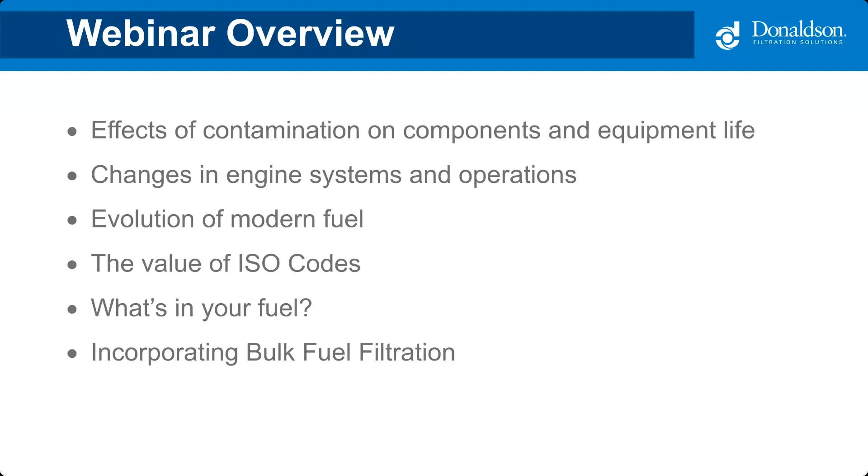For those unfamiliar with Donaldson Company, we are a filtration and separation company that's been solving complex filtration challenges for over 100 years and continues to advance filtration for a cleaner world. Today, we are one of the largest providers of unique filtration technologies, and we excel at producing high-quality filters and parts. We pride ourselves as having a global reach with a local touch. Our world headquarters is in Bloomington, Minnesota, and we have 55 manufacturing plants and 11 distribution centers around the world to support our customers.

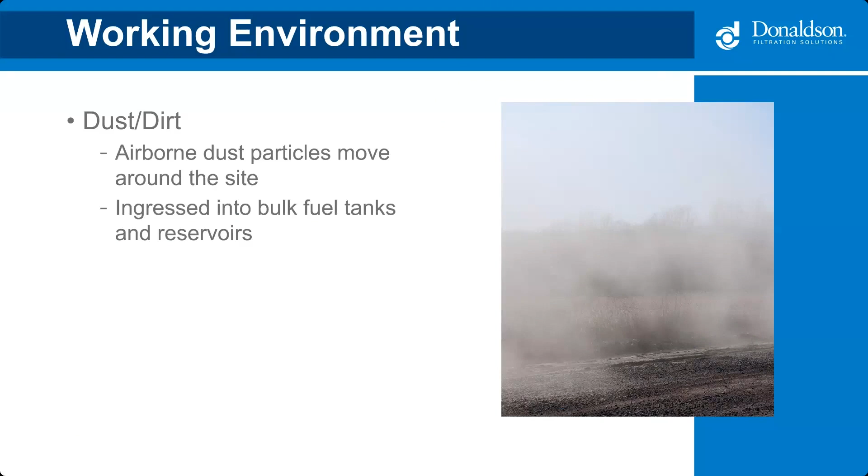Well, first, especially in the mining and oil and gas environments, heavy equipment environments like that, our working environment brings with it a lot of contaminants to that space. Number one is the dust and dirt. Airborne dust particles move all around the site, and every time that we actually dispense fuel into something, we have to replace that volume of fuel with sucking it back into the breather. Anything that's floating around in that atmosphere is going to be pulled into there. Dust and dirt are likely culprits that get sucked right into that tank.

Along with any moisture, we don't think about that nearly as much. A lot of tanks maybe have rain covers or caps. But any humidity or moisture that's in the air, or even water from production of whatever the environment is, that moisture gets pulled back into that tank too. Think about, especially in the summer or spring and fall days, very humid outside. That humid air gets pulled into the tank and is able to come in contact with any of that fuel.

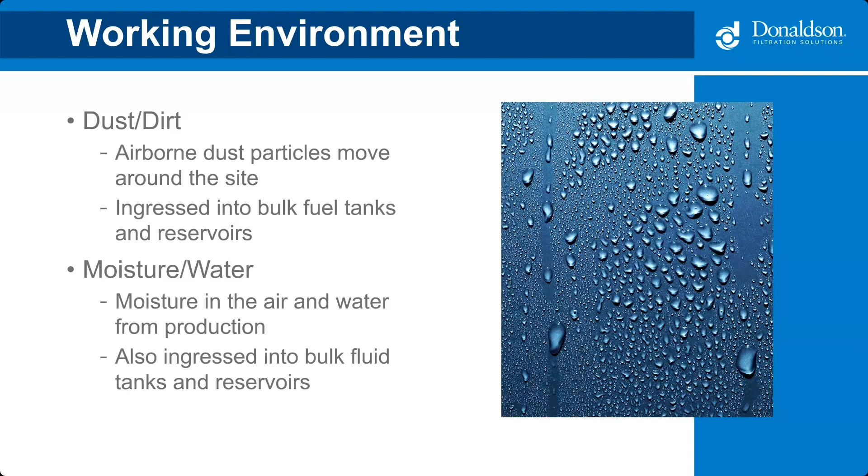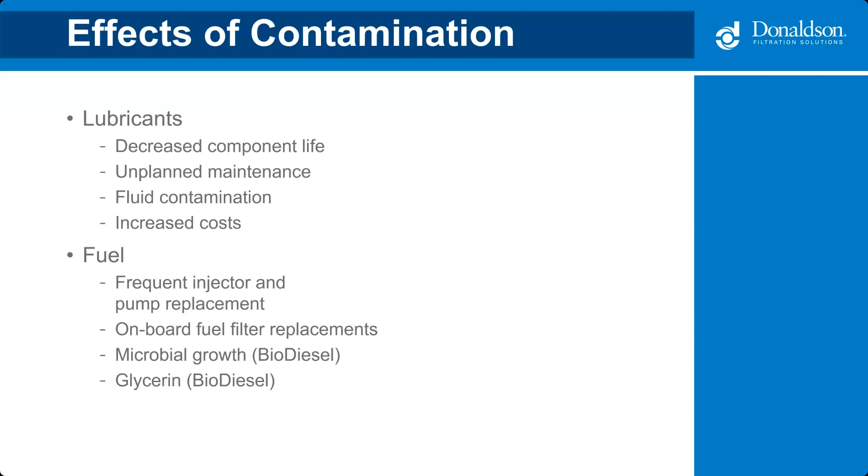Now, that working environment, those contaminants that are there, do lead to some effects that are on equipment. When we think about lubricants, probably everybody's fairly familiar with that. If we have contamination in the lubricant circuit, we have the decreased component life. It might come up with unplanned maintenance, maybe some fluid contamination, and overall increased cost for that system. But a lot of times we don't transfer those same thoughts to the fuel circuit, when in reality, those same issues occur on the fuel side of it, but we don't necessarily always think about keeping our fuel up to that same level of cleanliness.

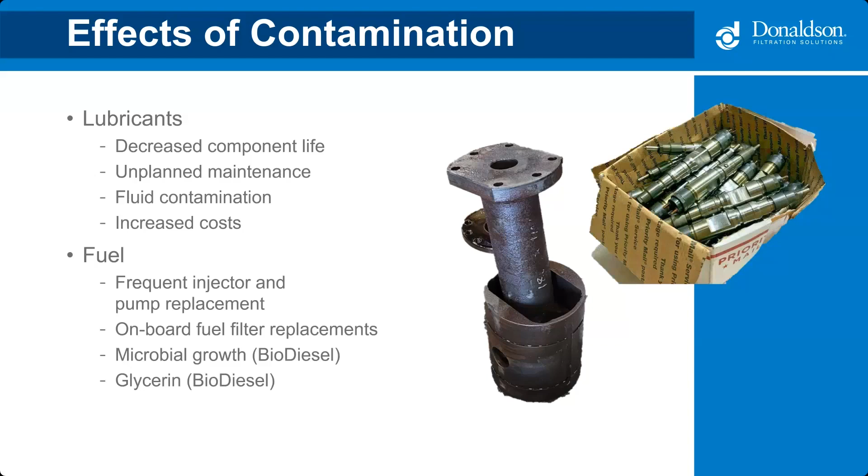We can see frequent injector or pump replacements. We might see onboard fuel filter replacements happen at a high degree, maybe large contaminants or sludge like you see on the picture there. Or even if there's biodiesel being used, we might see microbial growth or glycerin dropout, some of the different things that can occur if we allow that contamination into that fuel system.

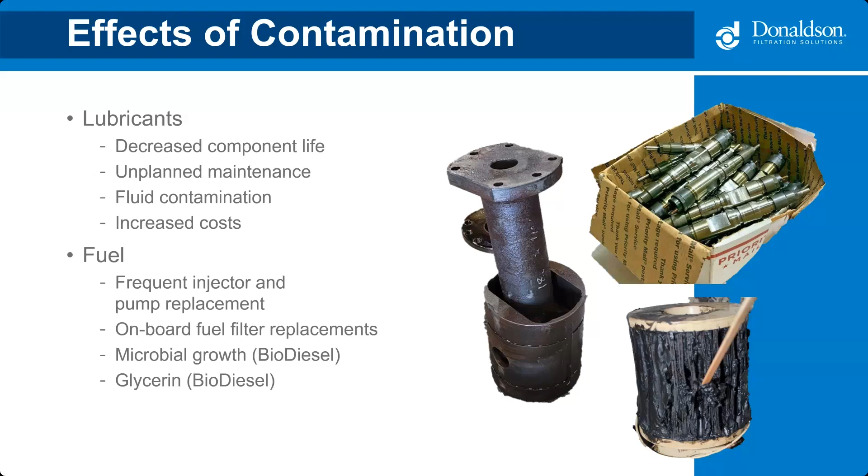Now, one of the questions that gets asked quite a bit is, why the big change? Why are we talking about this now? I've been doing this for 20, 30 years, sentiments like we've been having filtration the same way. Why are we changing it?

Well, the diesel engine itself at its core is relatively the same, but what's changed dramatically is how we deliver fuel to those cylinders. If you've been around long enough, you've heard about different changes with the EPA to get higher efficiency for that fuel out of that engine. The best way to do that was to increase the fuel injection pressure of those systems. If you're familiar with the term high pressure common rail, almost all diesel engines have now changed over to that system. Where we used to have injection pressures of 3 to 5,000, maybe 6,000 PSI, we're now living in a world where injection pressures are 40,000 PSI plus.

We've also reduced sulfur, added biodiesel to systems, added exhaust after treatments, changed the oil viscosity levels, and added a lot of computers and overall cost to these engines. That makes a big difference in how we are able to operate them.

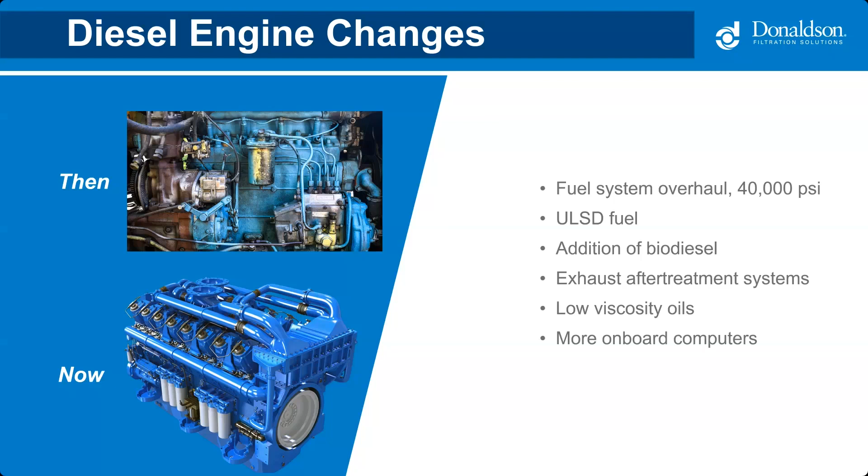Those tighter tolerances no longer can deal with that same level of fuel quality that we previously had. If you're familiar with some of those older series engines, you might recognize those filters were typically 10, maybe 30 micron for on-engine fuel filters. Today's engine fuel filter sets are usually somewhere between 2 and 5 microns, because that's the size of particulate that is damaging to those injectors and pumps. Somewhere in between bacteria and red blood cells, or 2 to 5 microns, those are the size particles that are damaging to those components within the fuel system.

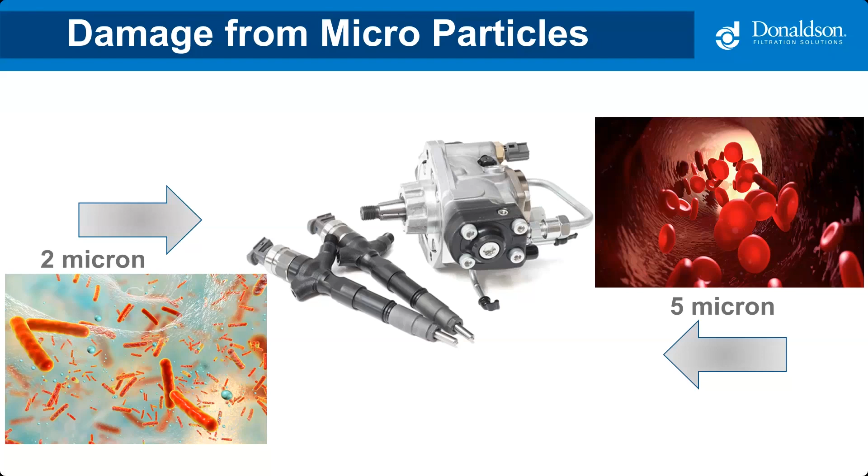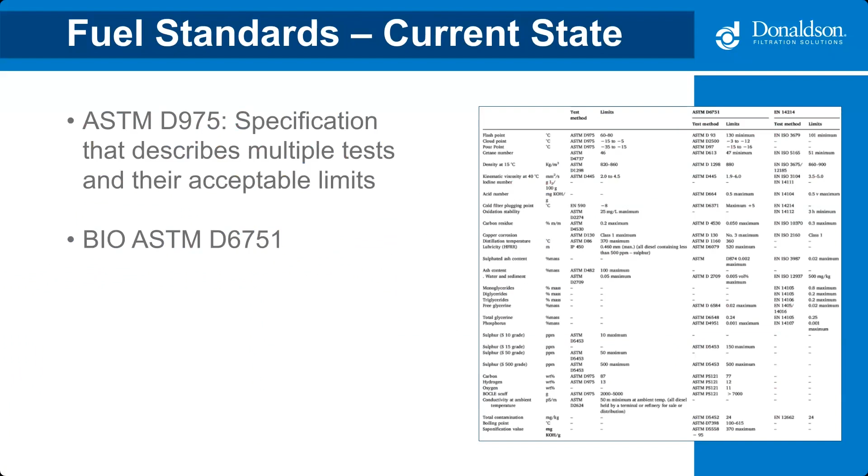Now, another question that gets brought up quite a bit is, okay, engines have changed, how we deliver fuel has changed, well I'd assume that the fuel has changed too. And you're right, there are specifications. I don't expect anybody to actually read the small print, but there are specifications for how fuel is regulated and what it needs to hit. The unfortunate thing is, although we've changed allowable bio content and reduced the sulfur content within fuel, the allowable amount of water and the allowable amount of dirt within diesel fuel has not changed at all since the late 70s.

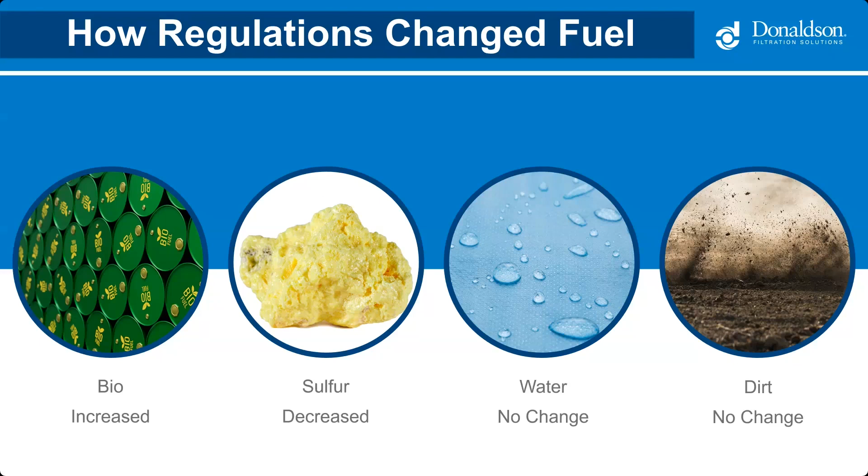The unfortunate thing there is today's engines cannot handle that same amount of dirt that was in yesterday's fuel, but we're still allowing that same amount of dirt to be there. What that means from a testing standpoint — again, I grew up doing some farm and construction type stuff — if ever we thought we had a fuel problem, typically what you'd do is dispense it in some kind of clear container, hold it up to the light, and say, okay, does that look clean and dry?

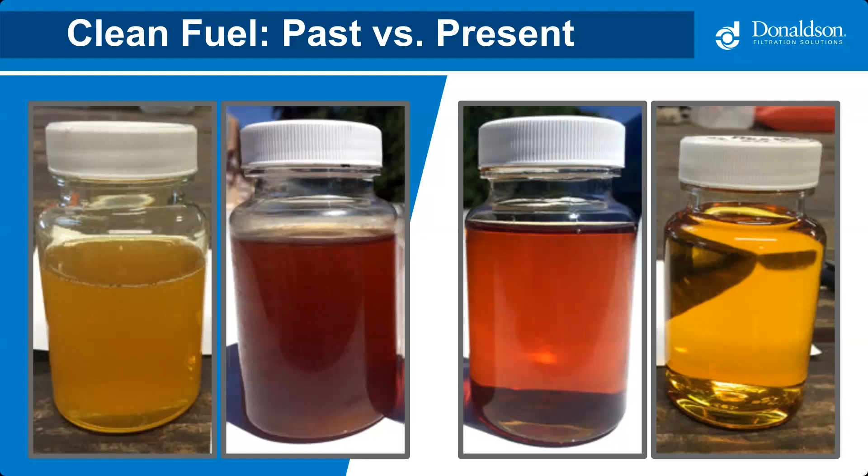But when we look at these fuel samples, hold those up to the light, those things look crystal clear. To the naked eye, looking through it, I don't see any water in there, I don't see any particulate in there. And that test for previous series engines actually worked out pretty well, because anything you could see in there was, okay, bad fuel, too big to go through that fuel system. But remember that 2 to 5 micron level we're concerned with today for today's high-pressure common rail engines — that, unfortunately, is invisible to the naked eye.

Even if it looks clear and dry to the naked eye, there's unfortunately going to be a really high concentration of small particles within that fuel sample, making its way into the fuel system and causing damage invisible to your eye. So how do we tell whether a fuel is clean enough or too dirty to be used in today's engines?

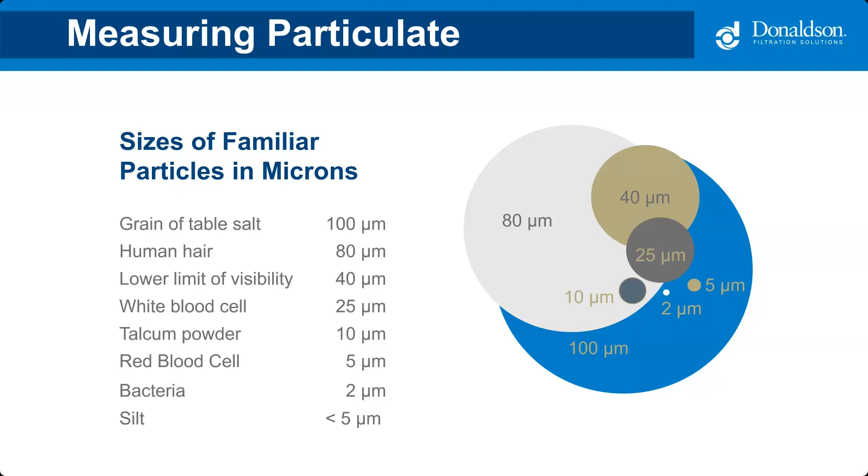The answer is the ISO cleanliness code. Some of you may be familiar with this. It's used to measure all sorts of different fluids, whether it's engine oils, hydraulic oils, gear oils, or fuel. Essentially, it's a way to describe the dirt or particle concentration within a volume of fluid, typically broken up into three numbers: the first is for all particles 4 microns and larger, the second for all particles 6 microns and larger, and the last for all particles 14 microns and larger.

When we're talking about fuel and high pressure applications, we have really small tolerances, so typically what we're focused on is that first number in the ISO cleanliness code. So for the rest of this, when I refer to a certain number, I'm referring to that first number, all particles 4 microns and larger.

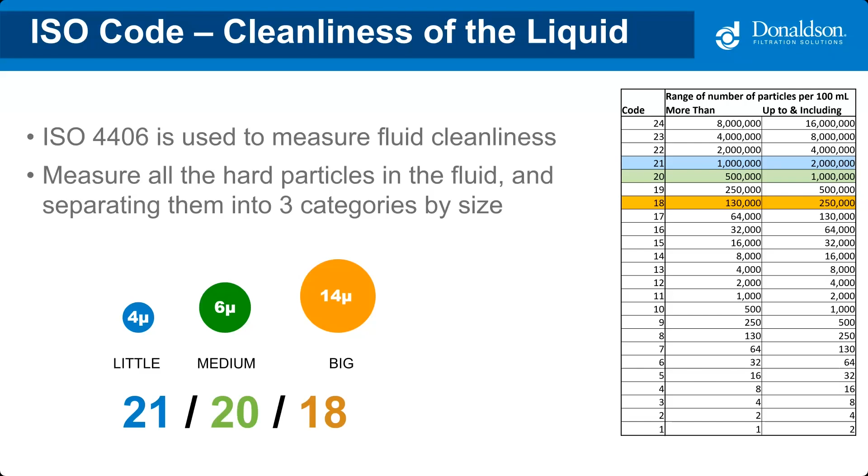But the other thing to be aware of is that this isn't just a linear scale. Each time you go up a code, you double the amount of dirt, so it's exponential in how it can get out of hand fast. Looking at that example code, a 21, on the blue line of the chart, there's roughly between 1 and 2 million particles in that sample given a cleanliness code of 21. Sample size is per 100 milliliters, so a little sample bottle would have somewhere between 1 and 2 million particles in it.

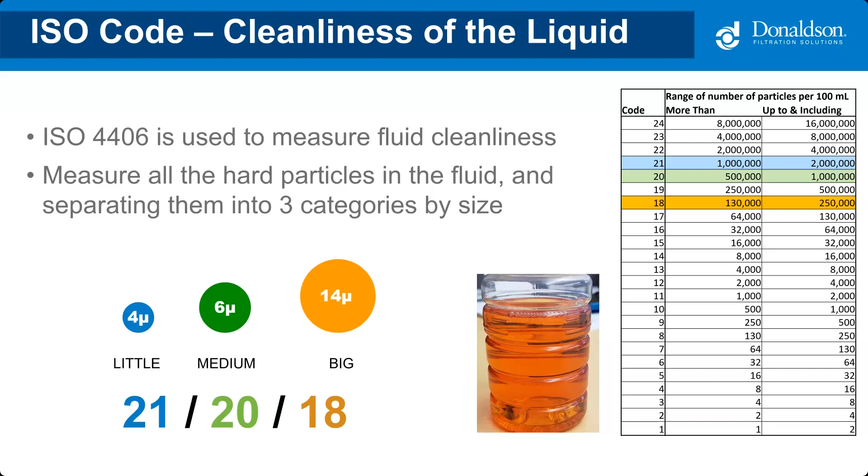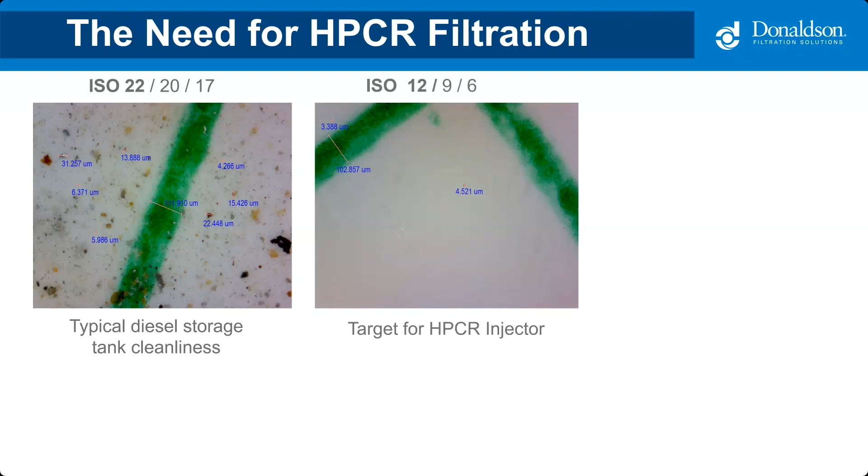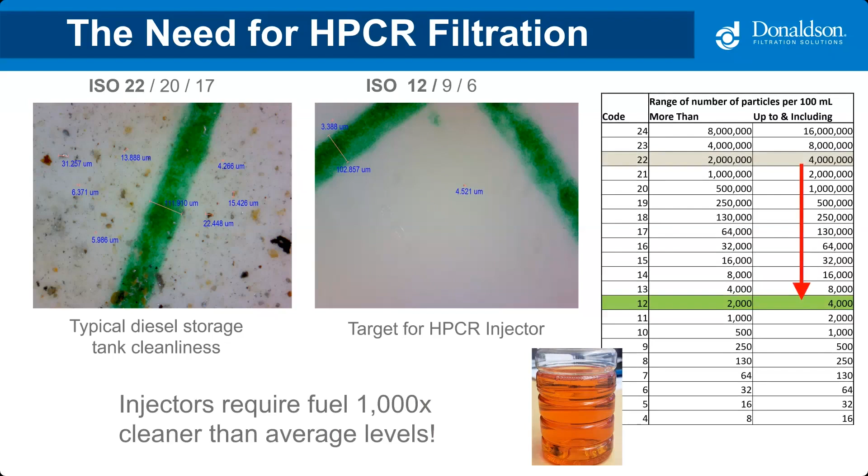Unfortunately, for today's high pressure common rail engines, we need fuel that's much cleaner. An example of what that looks like under a microscope is here at a 12 — there's roughly about 2 particles in that entire patch visibly seen. So we have a jump needed from inside that tank at roughly a 22, or between 2 and 4 million particles, down to a 12, or between 2,000 and 4,000 particles, before that fuel can be burned correctly in the engine. That's about 1,000 times cleaner than your average tank levels, and that's a lot to expect of that onboard engine fuel filter.

Then we look at the actual injector itself, probably the most susceptible piece within the fuel system that can be damaged or fail to reach its lifespan. This data here is actually from the largest injector manufacturer in the world, and what they state is that if you're able to get to that 12 level, represented by the green line, essentially 2,000 to 4,000 particles in that sample bottle, they'll reach what they call their lifetime, or roughly a 20,000 hour service interval.

But take a look at the lines underneath that. If we go up just one code, from a 12 to a 13, we've lost more than half the life of that injector. Go up another code, and we're at less than a quarter of the original injector life. So if you've been part of any organization where injector life has been extremely diminished, or there's a feeling that today's engines and injectors just don't last as long as their predecessors, most of the time that's realistically a result of fuel that's too contaminated to operate in today's high pressure common rail engines.

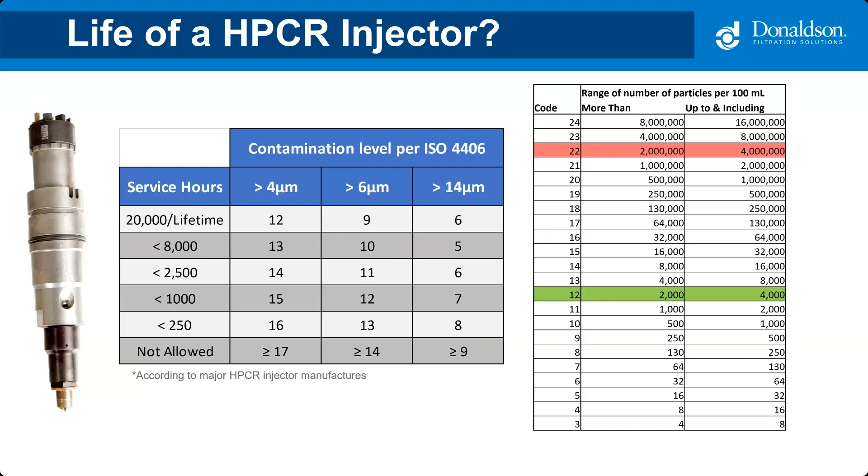If you've ever heard the term injector leak down, leaky injectors, or even had extended cranks during start where you get a lot of smoke coming out the tailpipe right at initial startup, typically that's caused by it not being able to hold back that pressure because of those contaminants.

If any contaminants or debris make it through there, remember we're at injection pressures of 30 to 40,000 PSI. If that contaminant makes its way through, those are the same pressures that a water jet cutting machine uses to actually cut through steel. So if you accidentally have any of those contaminants in there, it's going to open up that hole on an injector nozzle tip.

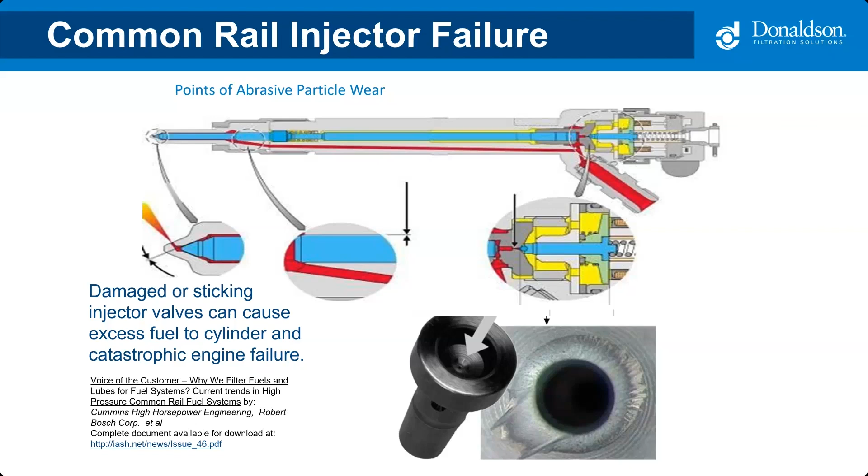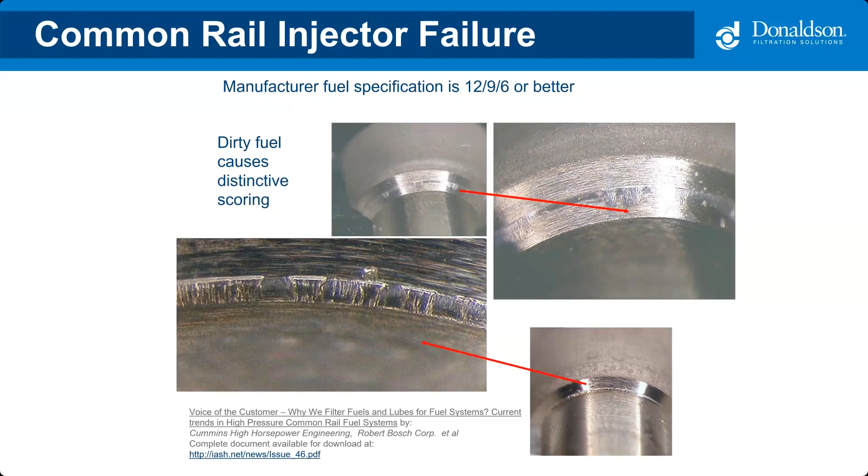And some of these pieces, when viewed under a microscope, to the naked eye again look pretty much like a polished surface. But when you look under that microscope at a really small level, we can see those small little nicks. Those are the things that cause injectors to not be nearly as efficient at atomizing fuel as they previously were.

A visual of what that looks like: your new injector really gets a nice fine mist. I use the analogy a lot of putting your thumb over a garden hose - you can get a really nice fine spray.

But as you open up that port or nozzle at the end by allowing contaminants to come through, much like taking your thumb and moving it off the garden hose a bit, you start to get back into a stream with large droplets. That fuel can't combust nearly as easily, and it doesn't completely fully burn. What then happens is you have unburnt fuel that ends up in the exhaust stream.

And if you have a piece of equipment that goes into multiple regens or is regenning quite frequently, you're plugging DPFs, you may get check engine lights, you might get reduced horsepower, or your overall horsepower utilization has dropped dramatically. That likely is an effect of that injector not being able to properly spray at the same level as it once did.

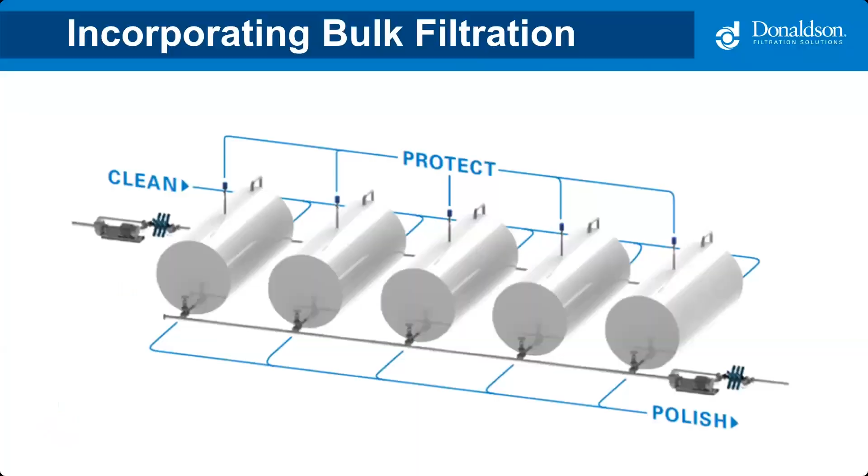What that looks like is incorporating bulk filtration. We need high efficiency filtration to be able to ensure that in a single pass, we're able to get to those target cleanliness levels before it's put in today's equipment. There are really 3 steps that can ensure that fuel is protected at a high enough level, and we usually go by the terms clean, protect, polish.

We want to clean that fuel on its way into the tank, ensuring that any contaminants brought to us are removed before it goes into the tank. We want to protect that fuel while it's in storage by having a breather on there.

And then we want to polish that fuel on the way out, making sure that no matter what, any fuel dispensed into your equipment is going to be clean and dry and ready for use.

I get a lot of questions about why would I want to filter it on the inlet as well as the outlet side. It seems like it's kind of redundant. In a sense, it is. But when we think about those standards I showed at the beginning and what the allowable amount of contaminants and water and different things can be within a load of fuel, this is what those work out to be.

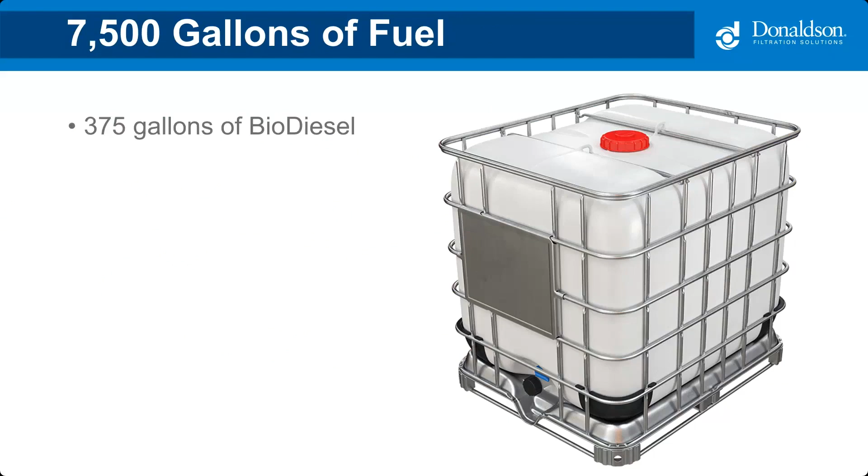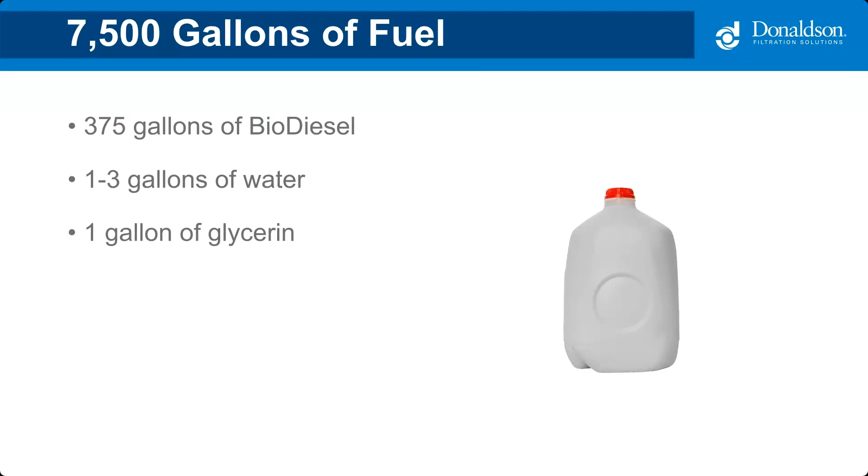Your typical fuel trailer delivery is somewhere between 7,000 to 10,000 gallons, with most hanging around 7,500 gallons. Within that trailer load of fuel, you can have up to 375 gallons of biodiesel, 1 to 3 gallons of water actually delivered to you, and a gallon of glycerin, a byproduct of making biodiesel. Even if you buy B0 non-biodiesel fuel, you still have roughly up to about 5% biodiesel in that, whether you want it or not. We typically have somewhere around 5 or so gallons of additives, which is kind of an unregulated realm - it can be all over the place. And last but not least, on average, you're accepting about a cup of dirt for every trailer load of fuel.

Especially in environments like yours with mining, oil and gas applications, we're not just going through a trailer load of fuel once a month - we're potentially doing that daily or multiple loads a day. That dirt really starts to add up.

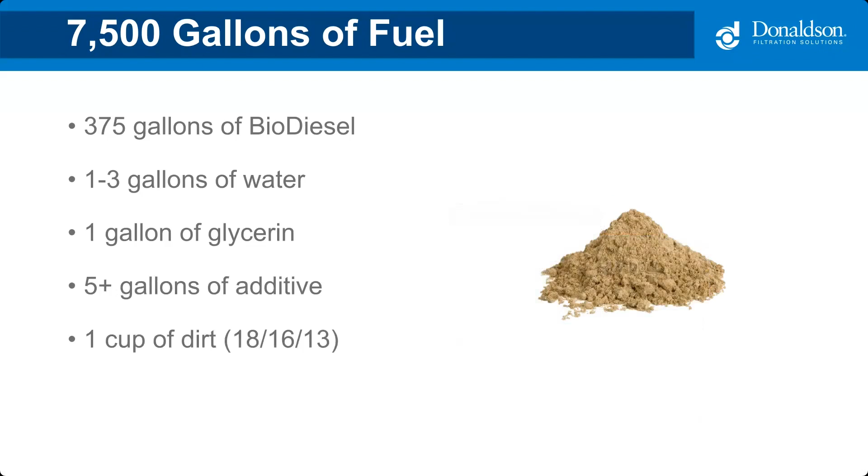The other possibility is, I'm sure everybody's heard about receiving a bad load of fuel, or somebody's bought fuel seconds to try to save some money. A lot of the times that fuel is really contaminated. If that fuel gets put into your tank, once it's in your tank, you own it, it's yours, it's your problem. If we have filtration on the inlet side, those filters are going to be able to remove and capture that contaminant, and stop any of that from entering the actual tank.

Second step in the bulk filtration side is a breather. Most tanks I've ever seen will have a stick breather that might have a gooseneck or candy cane neck to prevent moisture from raining directly into that tank. They might have an inverted top that's preventing rain, but most of them are just wide open vents. At most, I've seen some screen door kind of zip tied around it to make sure that birds or squirrels don't come into that tank.

We've talked quite a bit about dust ingression - especially, for every 100 gallons you dispense, you've got to pull in 100 gallons worth of air. We can all probably agree that dust is going to be pretty easily pulled into that.

But probably one of the biggest contamination factors within fuel is actually the moisture. We don't typically think about it from a humidity level, but let's take a look at this scenario. Say you've got a humid day outside - especially in summertime, depending on where you're at, that can be really sticky. We dispense, say, 1,000 gallons of fuel into something - we've got to pull 1,000 gallons of volume of air back into that tank.

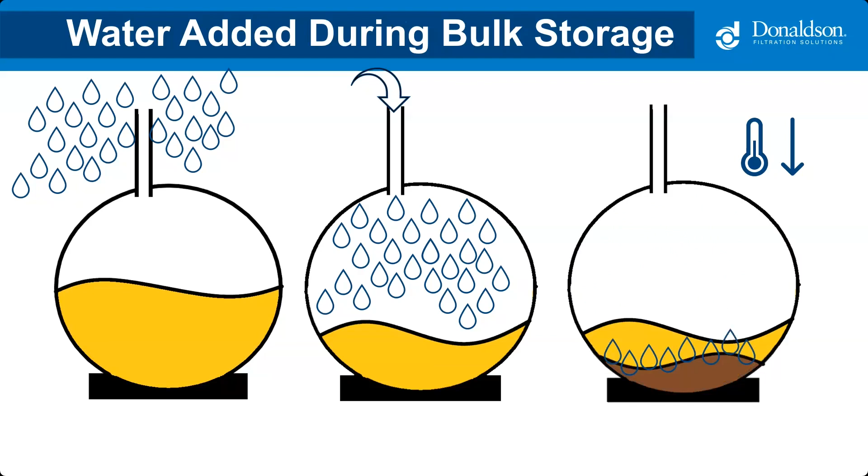And when you have moisture within that tank, that creates a rag layer in the bottom. Especially with today's fuel of ultra-low sulfur diesel, with fuels with bio content in it, we get a rag layer, we get microbial growth, we get all sorts of things that can occur inside of that tank that really wreak havoc and cause all sorts of issues on the piece of equipment itself, which usually rear their head as rapid plugging on the engine.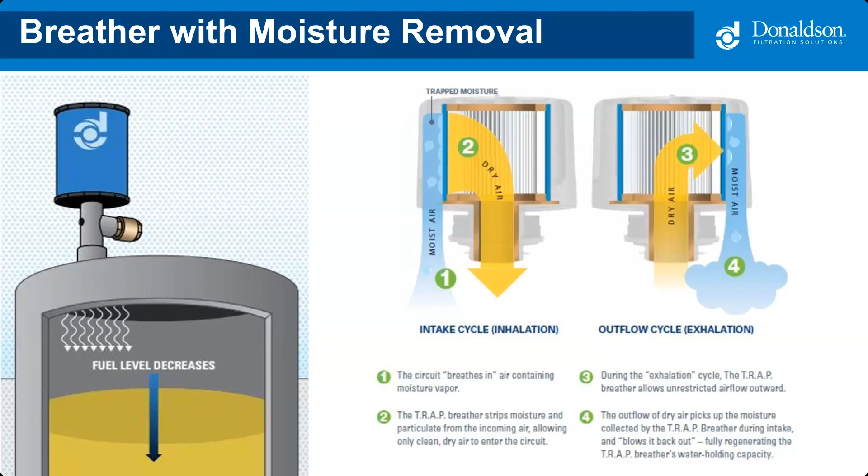There are solutions to this, using a breather that protects against both moisture and particulate, like the one you see here. This one works by trapping moist air on a membrane on the outside. That air then passes through a particulate breather and enters the tank dry. As the tank exhales, it pushes that moisture back off, allowing the filter to be regenerative, while making sure any air coming into the tank is clean and dry. Because if we don't, moisture and dirt contamination develop into really bad scenarios.

If anybody here has ever had to pay for a tank cleaning, or had the habitual issue where they've got microbial growth and keep shocking the tank but can't stay ahead of it, it's because there's water in that tank. Until you actually remove that water, you'll end up dealing with issues like sludge at the bottom of the tank. And as soon as it reaches the pump's pickup, those contaminants get dispensed into the equipment.

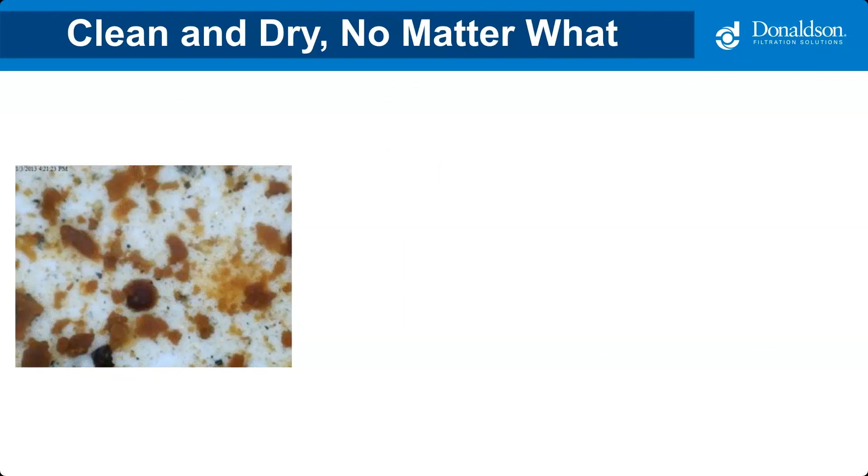Finally, and probably the most important portion of this equation, is the polish side. We want to make sure that whatever fuel we dispense, regardless of dirt in the tank or an offloaded bad fuel batch, anything getting dispensed to the equipment is clean and dry and ready to use. So whether we've got a fuel sample like this—an actual real sample from someone buying fuel seconds in Southern California from across the border—or a glycerin dropout from a biodiesel application, it doesn't matter the type of contaminant that's upstream.

Once we pass it through these high efficiency filters, we can guarantee that in a single pass, we're going to meet that ISO cleanliness code we talked about at the beginning. So it takes the guesswork out of having to test that fuel, send it off to the lab, do patch tests, whatever it may be. These results are guaranteed in a single pass—high efficiency filtration will get you to your target results.

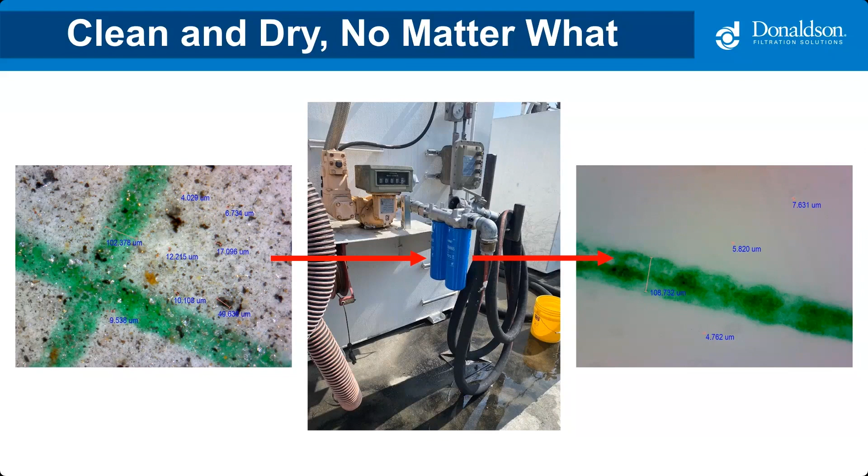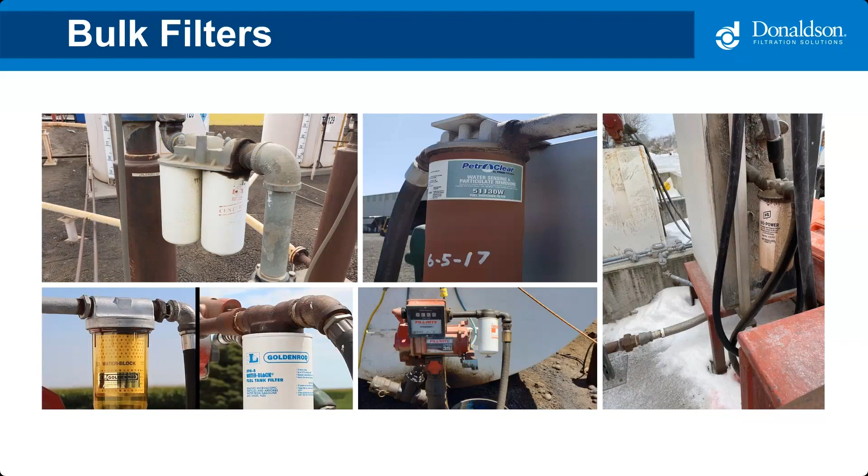Now, one of the other questions I get quite often is, well, I already have filtration on whatever tank it is, or there's filtration set up on here—what's the difference between what you're talking about and what we've been using in the past? The big difference really comes down to efficiency.

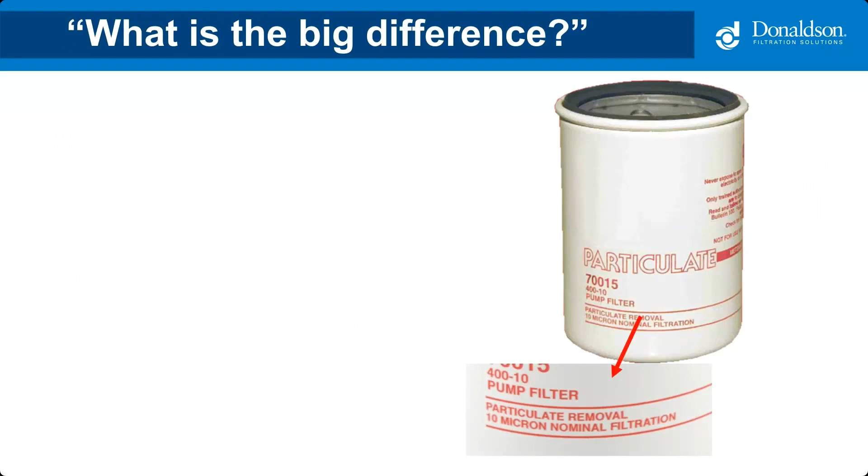Most filters out there on units today, whether it's the filter at a retail gas station or on your typical dispensing application—bags or spin-on cans—most of them are somewhere around 10 to 30 micron nominal filtration. If you're unfamiliar with that term, nominal filtration means average, or roughly 50%. So if we had 1 million particles upstream of this filter, you'd still have about 500,000 of those particles downstream. And remember, there's roughly 1 million particles in every little 100 milliliter sample bottle.

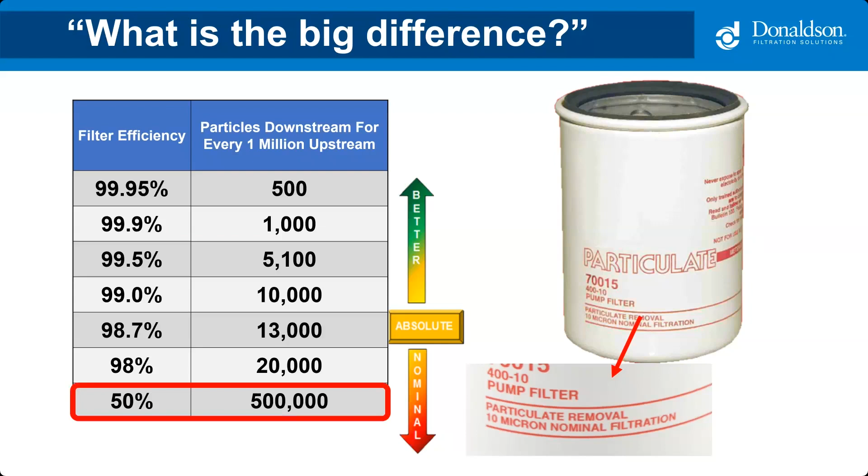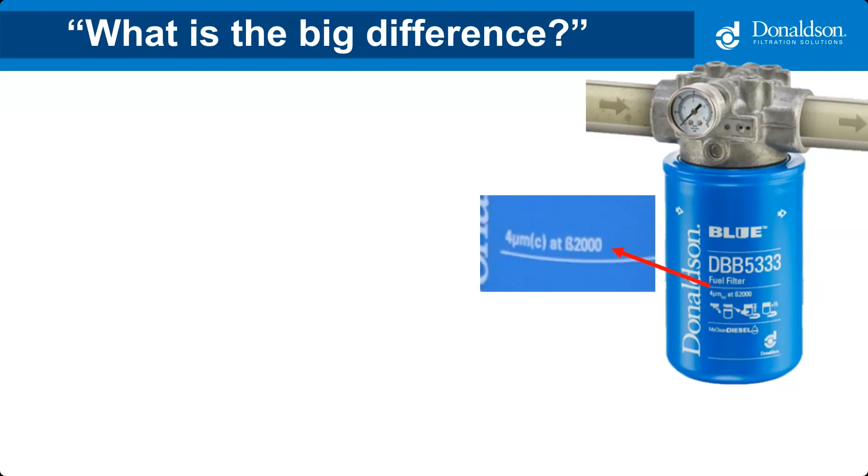The filtration I'm talking about is high efficiency filtration. For example, these filters here are rated at beta 2000, or 99.95% efficiency at 4 microns. If you recall, that's the level—between 2 and 5 microns—where particles can cause damage to the fuel system. So for that same 1 million particles upstream, at 99.95% efficiency, we're only going to have 500 particles left downstream. That's a big difference from your typical dispensing filter out there.

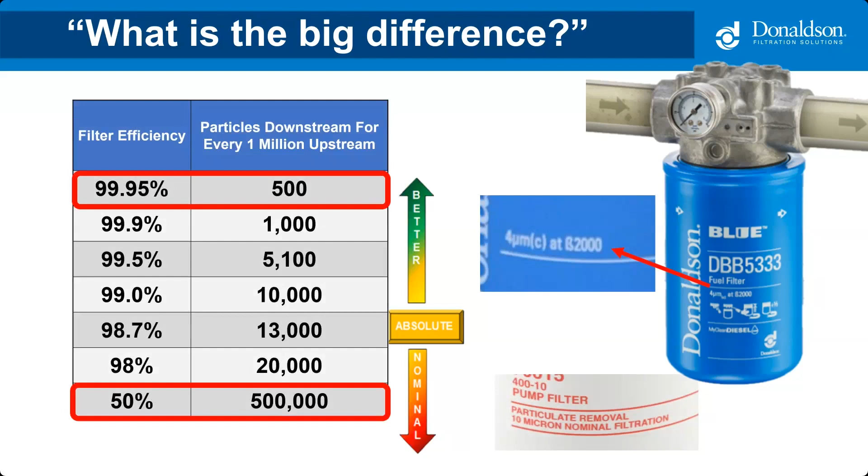Now, you do have your onboard engine filter—those are typically somewhere around 99 to 99.9% efficient. That still means you have about 14,000 particles per gallon making their way to that injector. On the other side, if we're able to use high efficiency filtration at that same outlet, we're now sitting at around 300,000 particles per gallon of fuel.

We go through that same onboard engine filter, and now we're only dispensing about 300 particles per gallon to that injector, and that's where that big difference in the amount of life comes from. If you remember that table showing how fast or slowly that injector life might last, it really comes down to the amount of particles per gallon of fuel that gets dispensed, and that's where your longevity comes from.

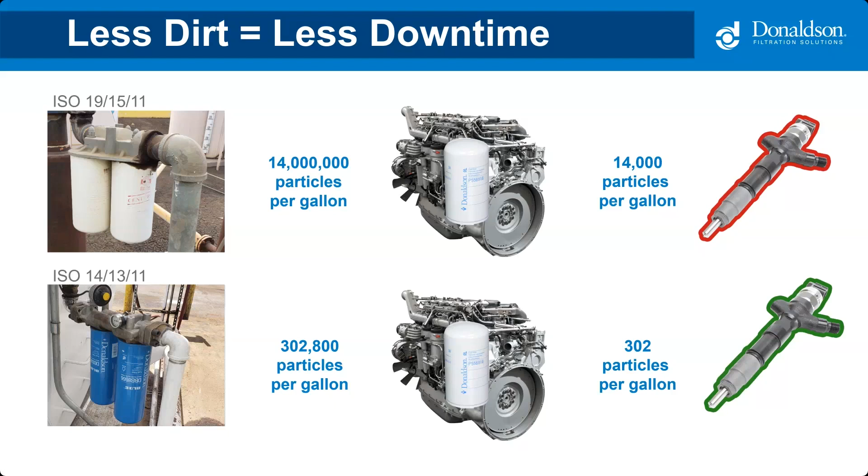So what does that mean in terms of dollars or real world scenarios? This is an application we worked on, and they were getting right around 8,000 hour injector pump intervals from their engine application. That cost is about $40,000 all said and done before that would be revamped and that engine could go back into service.

We were able to change from their current nominal filtration level on their bulk tank and put them in a higher efficiency bulk filtration application. So we're doing most of that work at that bulk tank. We're delivering clean and dry fuel to those pieces of equipment and allowing those onboard filters to work the way that they're supposed to. We still have that $40,000 cost to replace injectors when that needs to happen, but they were able to double the life of that injector and increase that service interval.

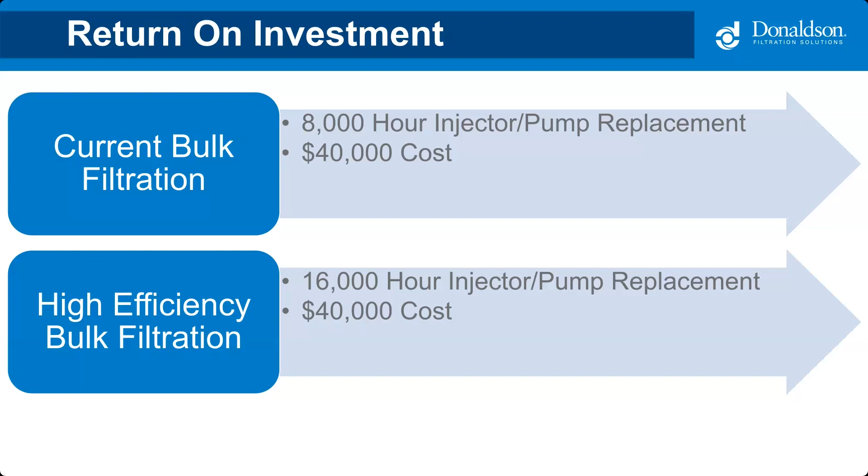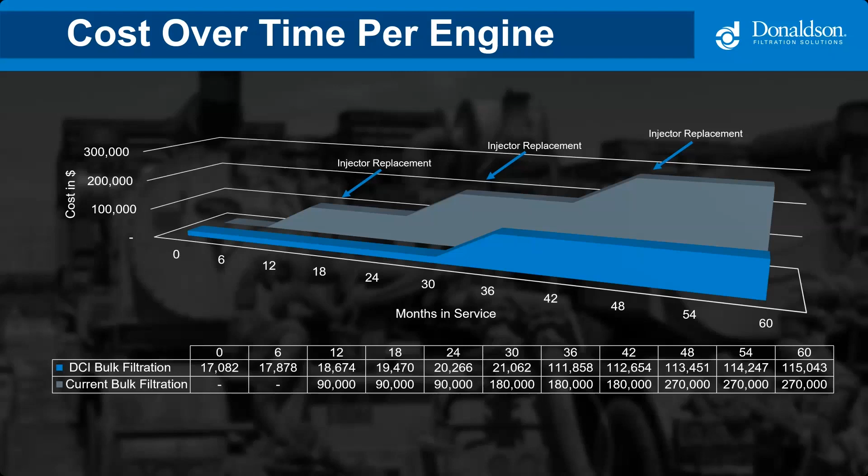So overall, what are the benefits of clean and dry fuel? We touched on most of these. We can reduce our maintenance costs: one, the premature injector and pump failure, or shorter onboard filter life. If you're seeing rapid plugging of that onboard engine filter and can't get to the actual service interval you'd like, that's most likely coming from a bulk fuel issue.

If we have downtime, we all have scheduled downtime for maintenance and repairs, but it's that unscheduled downtime that kills us. You can maintain fuel efficiency.

This is a unique thing to think about, but your fuel pump on those engines is driven by a gear that's right off the crank, and that crank needs to burn fuel in order to turn that pump to pull more fuel in. If we continually load that onboard fuel filter with contaminant, it's like sucking through a straw. If you pinch that down, you've got to work harder to pull that same amount of fuel through. So you end up having to burn more fuel to pull fuel through a plugged or plugging filter on the engine. If we can remove most of those contaminants at the bulk tank, we actually see an increase in fuel efficiency by about 1 to 3%.

And protect your investment. Remember, once that fuel is delivered to you and it's in your tank, it's yours, you own it. It's in your best interest to protect that and make sure it's not being contaminated by any moisture or dirt particles from outside that tank being ingressed in.

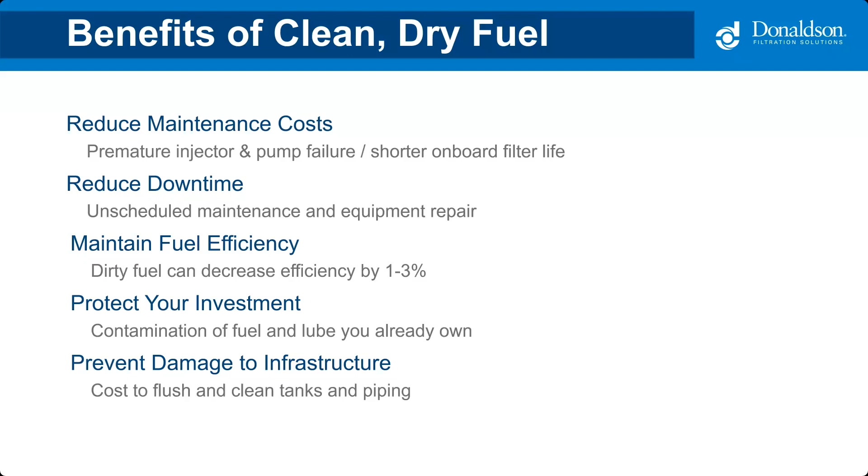With that, I'd like to open it up to any questions that anybody has regarding today's webinar.